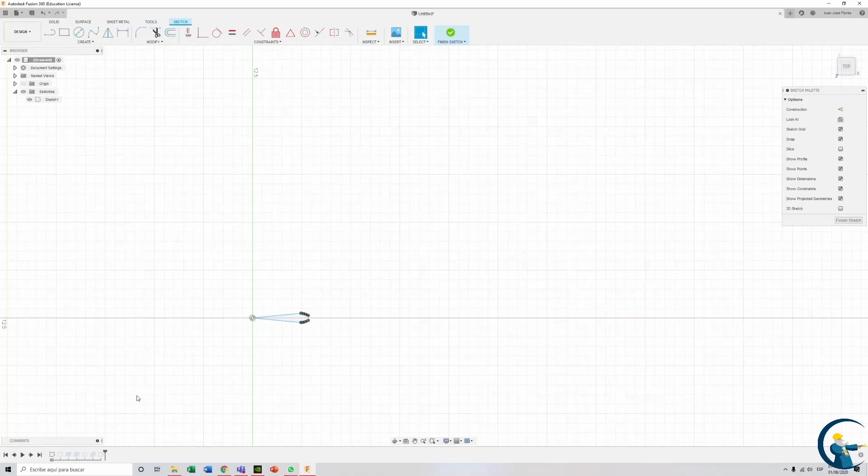As you can see, it displays a pop-up window in which we can input the characteristics of the gear, pressure angle, gear height, etc. One interesting thing is that all the variants except the rack have the Fast Compute option. The Fast Compute option is pretty self-descriptive. However, it's important you understand how it works so you can decide when not to use it.

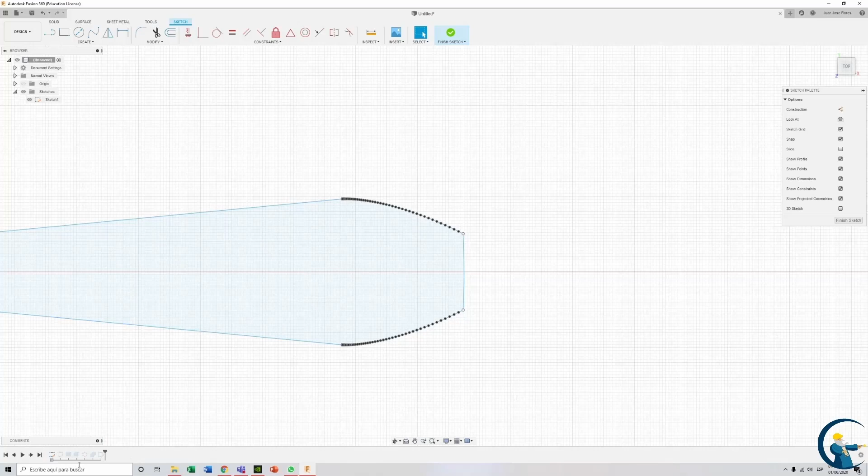Since Fusion doesn't support equation-driven curves, the envelope of the gears is made with a spline. If selected, this option sets the amount of points for the envelope spline curve to 50 regardless of the module, making the complexity of the sketch easy to handle. If it's not selected, the amount of points could go up to 450 depending on the module, giving more precision to the curve. Basically, you should always select this option unless you're laser cutting, 3D printing, or require that extra amount of precision.

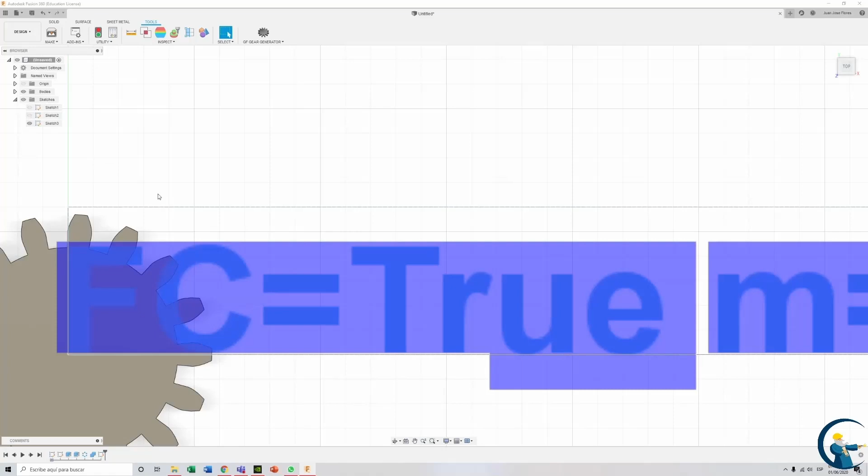All gears will show up at or near the origin, and they're built in a way that the process does not interfere with any existing bodies at that position, so you don't have to worry about them merging or something like that. They also have a sketch with the most important parameters the gear was made with, so you don't have to write it down in order to remember and avoid starting over. Each gear has its timeline grouped, so if you're working with many gears at a time, you can check their characteristics by deploying sketches, selecting the last sketch of the group, and making it visible.

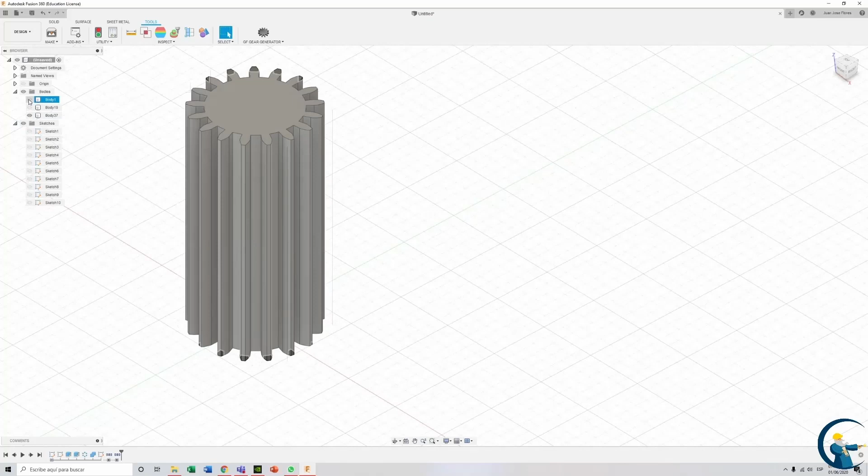Another important thing to mention is that not all gears are made to standard. Some are experimental, like the profile shifted and the non-standard internal ones. They were included because they've proven to be quite useful in 3D printing and respect the dimensions they're supposed to have, but they don't reflect the standard geometry nor the results of the manufacturing methods. If you plan on using these designs at an industrial level, you should not trust them to hold up in your end product or even look like they do in Fusion.

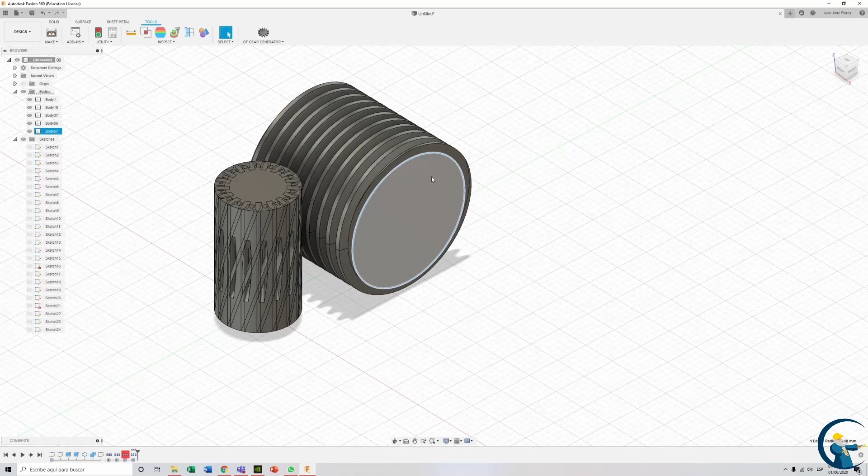Another important feature of the add-in is the worm gears. There are two types, the helical one, which uses a helical gear for the drive, and the hobbed straight one, which uses the screw profile to cut the gear. Another important thing to mention here is that when you input the radius of the screw, it will be this one and not the overall radius of the screw.